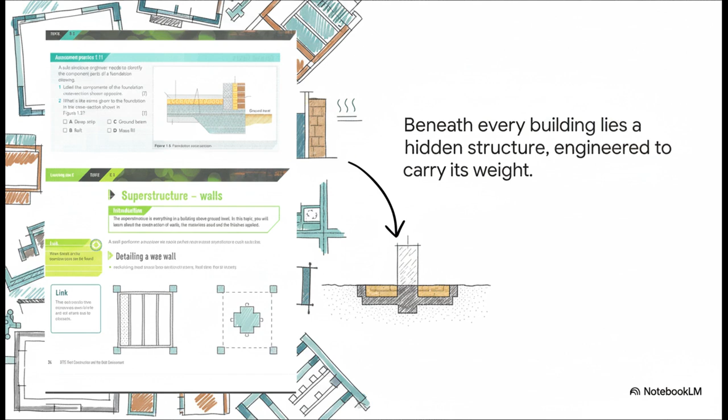So here's the game plan for this explainer. We're going to follow the whole process, right from the ground down. First, we'll look at how builders even prepare the site. Then we'll get into the huge decision of what kind of foundation to actually use. After that, we'll see how that foundation connects to the floor you walk on. And finally, we'll wrap it all up and see why this hidden world beneath our feet is just so important.

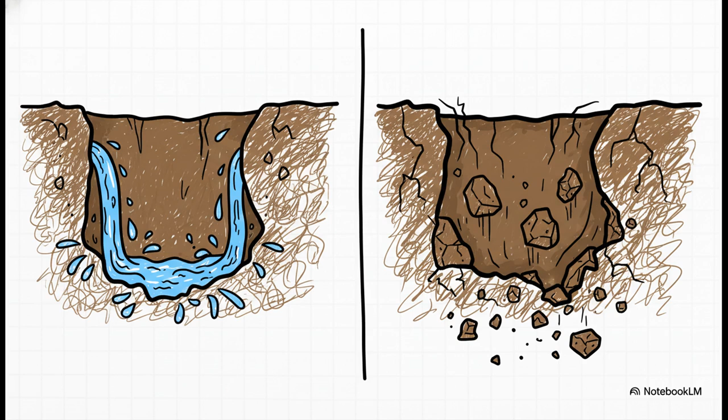All right, so first things first. The very first step in construction isn't building up, it's digging down. But the second you start excavating, you run smack into two huge challenges that have to be solved before a single drop of concrete gets poured. And those two challenges are about as basic as it gets: water and earth. First, you've got to control all the water that's just naturally in the soil. And second, you have to stop the earth all around your big hole from, well, collapsing in on itself.

Okay, let's talk water. See, the water that's already in the soil is called groundwater, and if you just leave it there, it can seriously damage the new building. The short-term fix is often as basic as it sounds. You stick a sump pump in the hole to get the water out as it fills up. But for a permanent fix, builders have to install special drainage systems to channel that water away for good.

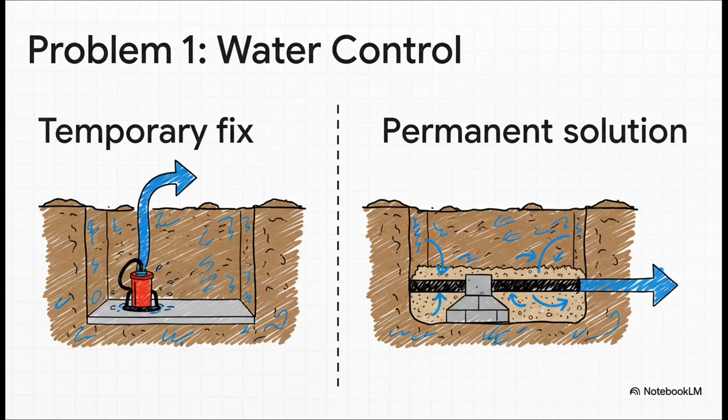The second problem is just gravity. The sides of that big hole you dug want to fall in, so to prevent that from happening, builders use what's called earthwork support. This can be anything from driving big steel sheets into the ground to using powerful hydraulic systems that literally push back against the trench walls.

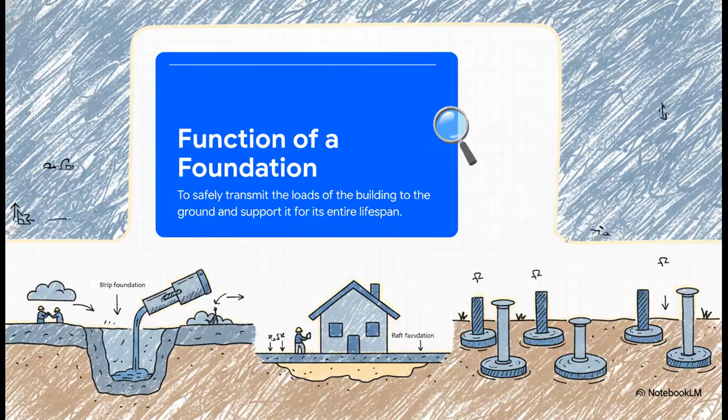Okay, so the ground is prepped, it's safe. Now it's time for the main event, choosing and building the foundation itself. And let me tell you, this is one of the most critical decisions in the whole project, and it all happens before anyone even thinks about laying a single brick up top. So what's the official job description of a foundation? Well, the source material we're using for this really puts it perfectly. Its purpose is to safely transmit the loads of the building to the ground and support those loads for its entire lifespan. Sounds simple enough, but man, it is incredibly difficult to get right.

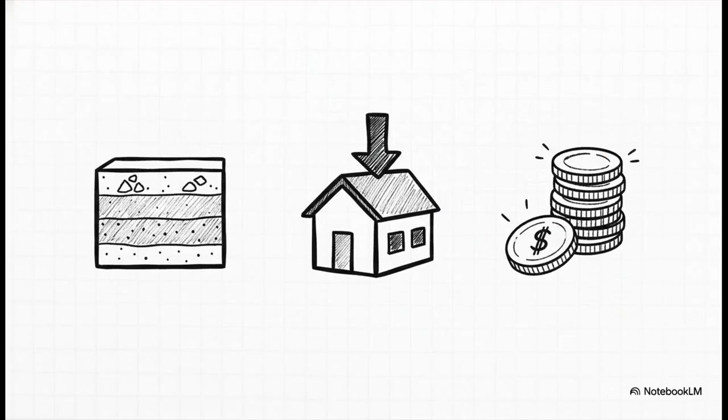No pressure, right? Now, this is definitely not a one-size-fits-all kind of deal. A builder has to choose the right tool for the job, and picking that perfect foundation really comes down to three key things: what kind of soil you're building on, how heavy the building is going to be, and of course, the budget. So let's look at the three most common types.

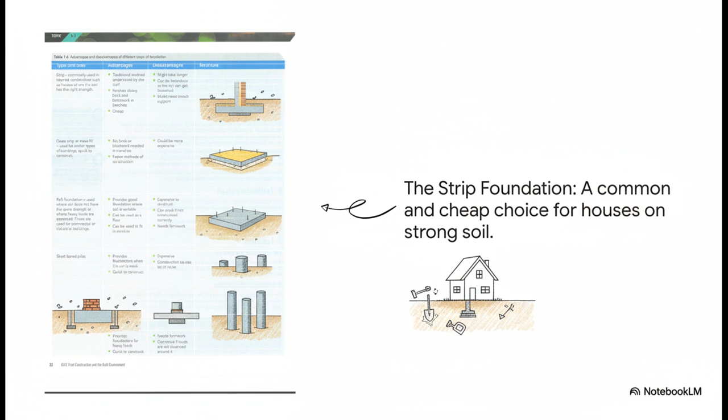First up, we've got the strip foundation. You can think of this one as the old-school workhorse, especially for houses. And it's pretty much what it sounds like: a continuous strip of concrete that runs directly under the main load-bearing walls. It just creates a solid line of support.

And here's the classic trade-off. On the plus side, it's a traditional method. Everyone knows how to do it, which makes it cheap. But the cons are a big deal. Digging all those trenches takes a while, and, more importantly, it means you've got people working down in those trenches. If that soil isn't perfectly stable, it can get really dangerous.

That's kind of the hidden risk of the cheapest option. So, what do you do if you have weak or unpredictable soil where a simple strip just won't work? Well, that's when you bring in the raft foundation. Instead of just a strip under the walls, this thing is one giant solid slab of reinforced concrete under the entire building. It's called a raft because the building literally floats on top of it, spreading its weight out super evenly. It's the go-to solution for tricky ground.

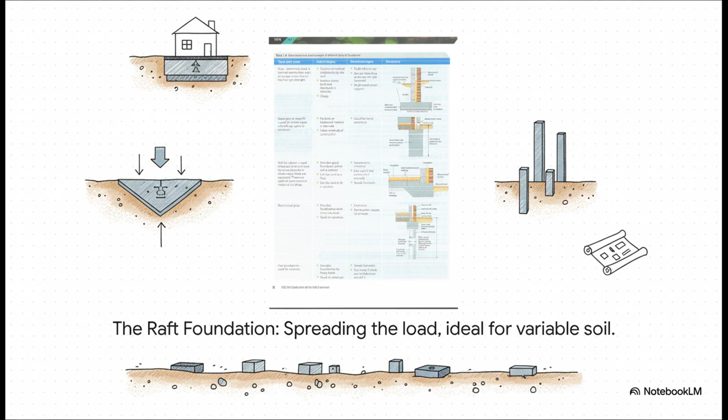The huge pro here is obvious, right? It totally solves the problem of bad soil. And a nice little bonus is that the slab itself can just become the ground floor, which saves a step. But the cons are just as big. It uses a massive amount of concrete and steel, which makes it expensive. And if that giant slab isn't engineered just right, any crack could compromise the entire building.

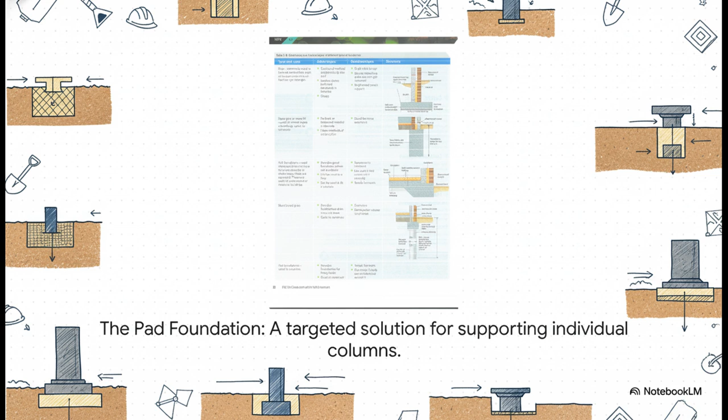All right, our third type is a little more specialized. This is the pad foundation. Instead of supporting a long wall, this is designed to handle a single massive point of weight. Imagine a huge structural column in a big office building. This is just a dedicated concrete pad, and its only job is to spread that one column's immense load into the soil below. So the main advantage here is speed and power. It's a really quick way to provide incredible support for a very heavy, focused load.

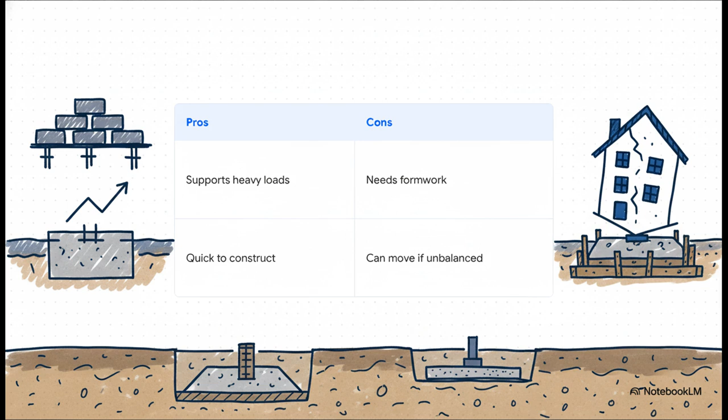The downside is that each pad needs its own custom mold or formwork to pour the concrete into. And there's an even bigger risk. All these separate pads under one building have to be perfectly balanced. If one sinks just a little more than another, it can put incredible stress on the whole structure above.

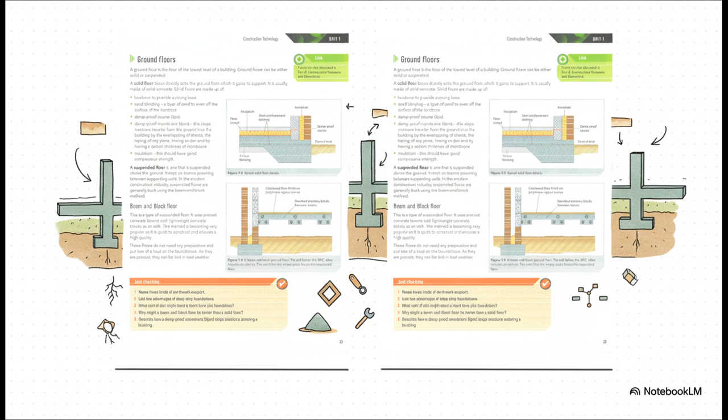The biggest difference really comes down to whether or not it touches the earth. A solid floor is simple, it's strong, and it sits right there on the ground. A suspended floor is held up above it, and that's great for sloped sites or, and this is a huge practical plus, it makes it super easy to run pipes and wires through that empty space. And these days, suspended floors are often built incredibly fast using precast concrete beams that are just craned right into place.

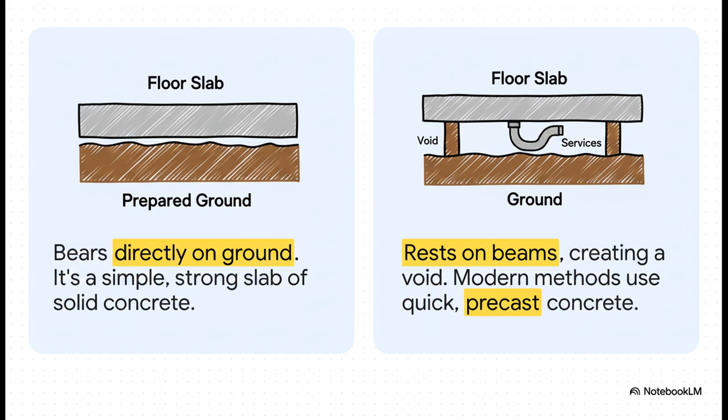So, after all that digging and supporting and pouring, let's just zoom out for a second. Why does this complicated hidden structure matter so much? Well, it really all comes down to this one idea. The foundation is the single most critical link in a building's entire structure. Everything you see above ground, what we call the superstructure, is constantly pushing its immense weight down. And the foundation is the one and only thing responsible for taking all of that force and transferring it safely into the earth.

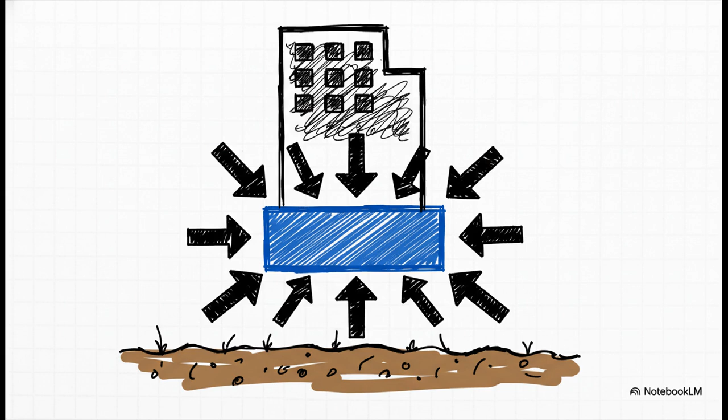If there's one number you take away from all this, it's this one: 100%. Every single pound of that building's weight, plus all of us inside, all the furniture, even the snow on the roof in winter, 100% of that total load has to pass through the foundation. There is literally no other way down.

You know, it's an old cliché, but it's a cliché for a reason. You can have the most beautiful design, the most incredible materials in the world, but if the foundation underneath it all is wrong for the soil or it's just built poorly, none of that other stuff matters. A building is, and it always will be, only as strong as its foundation.

So I'll just leave you with this final thought. The next time you walk into your house or your office or any building at all, just take a second. Try and feel that massive, silent, unseen hero working away, just a few feet below the floor, holding up your entire world. Thanks for tuning in.